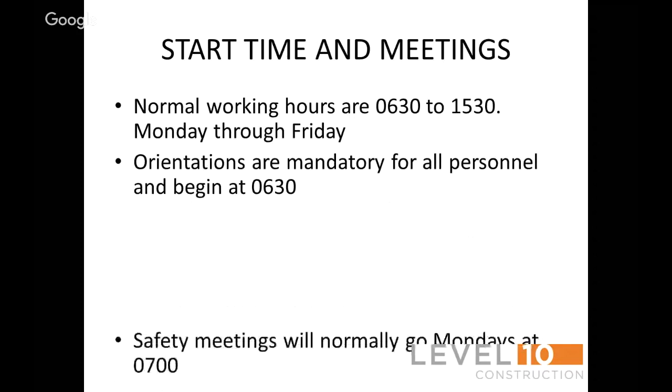Start time and meetings: normal working hours are 06:30 to 15:30, Monday through Friday, for all personnel. Safety meetings will normally be held Mondays at 0700. All floors are off limits until assigned for work. Parking is on the Timothy side of the building.

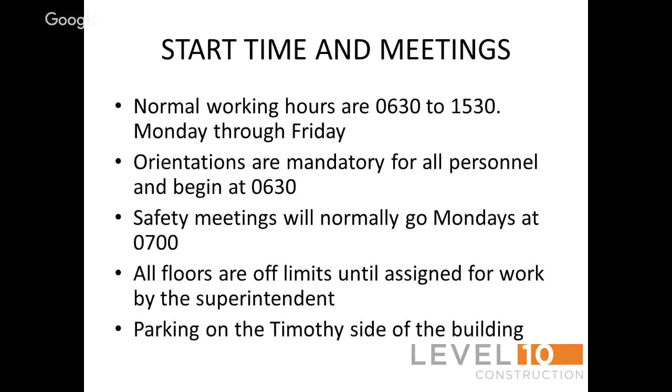At Level 10 Construction, first we need your help. We are beginning a journey together. We need your talents. Together, we will build at the highest levels of safety, environmental preservation, sustainability, quality, and value.

How will you work safely? You will plan and perform your jobs so you will continue to be injury-free. Superintendents, supervisors, and foremen will be safety role models for you. You will understand the safe way to do your task before you start. And you are authorized to stop work when you or anyone is in danger.

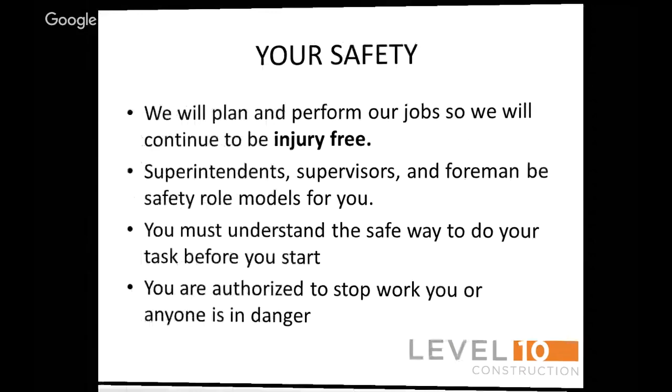What does it mean to work injury-free? Being injury-free means that you do not have a work-related injury or illness. You leave the job at the end of the day proud of the work that you have accomplished and the fact that no one was hurt. If you are a superintendent, supervisor, or foreman, the people you led today return home safely.

How do you do it? You need to pre-plan your work. Use your training or ask for additional training. Review the job hazard analysis. Be well rested and alert. Stretch and flex before you start. Think before you act, and complete pre-tasks.

We are working safe for our families, and we must protect the public and tenants we work around. Our safety program consists of an injury and illness prevention program, a heat illness and prevention program, a drug-free workplace, a stormwater pollution prevention plan, and a water and mold prevention plan.

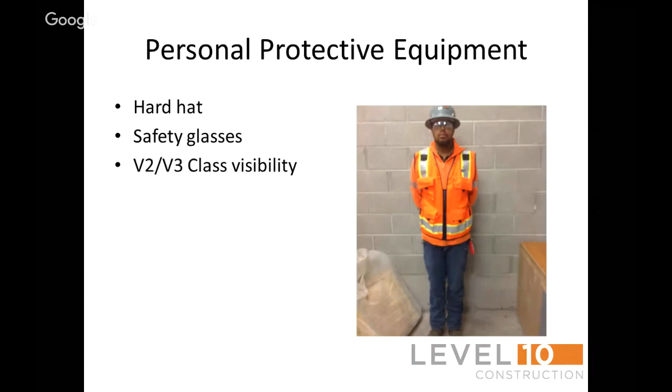You are required to wear a hard hat, safety glasses, Class 2 or Class 3 visibility, long pants, ASTM approved footwear, gloves, and shirts with sleeves.

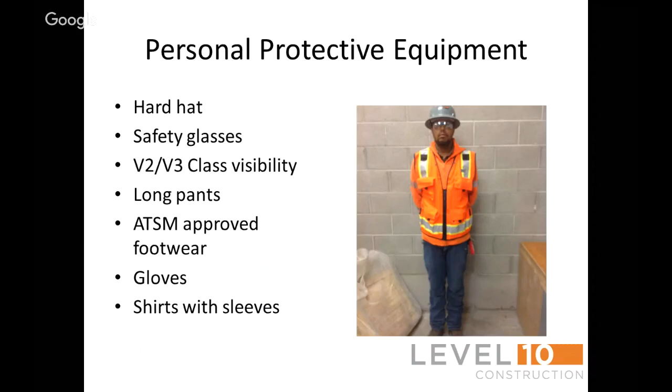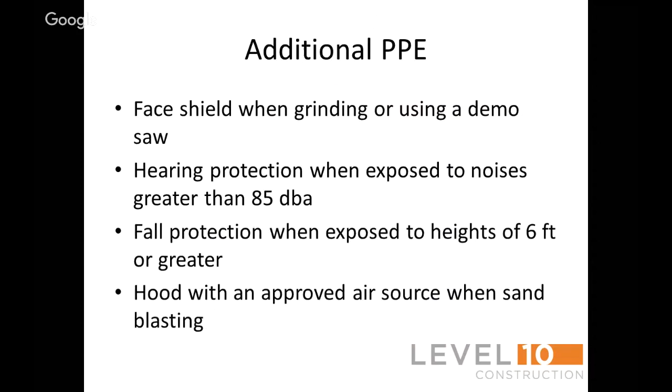Additional PPE may include a face shield when grinding or using a demo saw, hearing protection when exposed to noises greater than 85 decibels, fall protection when exposed to heights of 6 feet or greater, and hoods with an approved air source when sandblasting.

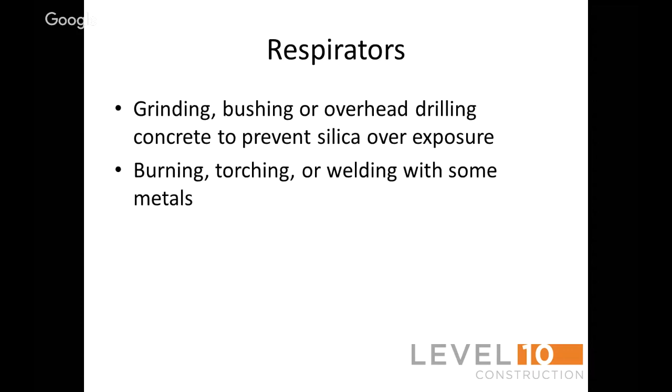Grinding, bushing, or overhead drilling concrete to prevent silica overexposure may require respirators. Burning, torching, or welding with some metals may also require respirators. You may be required to wear a respirator when the safety data sheet requires it.

Inspect your PPE daily when you wear it.

Heat illness prevention program: at least 2 quarts of clean water should be readily available per person, with 2 in reserve. Shade should be available at 80 degrees. At 95 degrees, the foreman will increase heat illness monitoring and take proactive steps to prevent heat-related injuries. Although this is a TI, sometimes the building will get hot. We still are required to follow regulations and monitor the temperature. It's not the temperature outside, but the temperature inside that we are worried about.

All employees have a right to take a break if they feel sick. Notify L10 management in the event someone is believed to be sick or injured.

A symptom of heat illness is thirst. You need to drink water to the point where you're not thirsty. Sweating is also a symptom. The first stage of heat illness is called heat stress or heat fatigue, when you get muscle cramps or headaches. The second stage is heat exhaustion, when you get dizzy, nauseous, or disoriented. The third stage is heat stroke. Usually at this point you stop sweating, you can lose consciousness, suffer brain damage, and you can die.

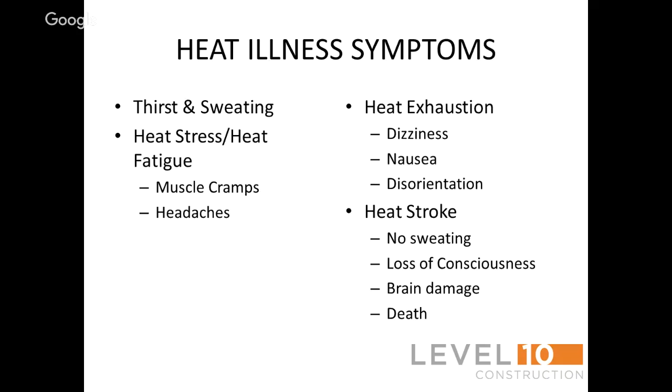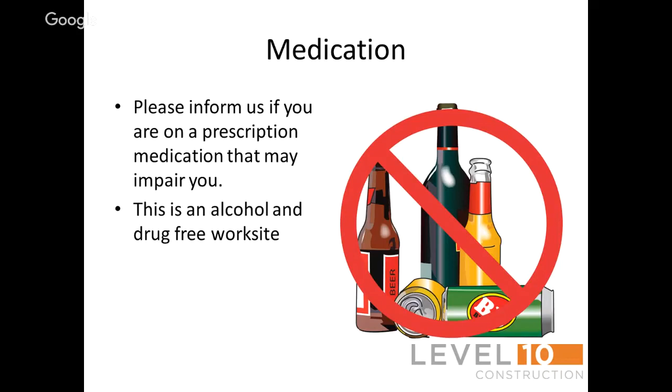Please inform us if you are on a prescription medication that may impair you. This is an alcohol, drug-free worksite.

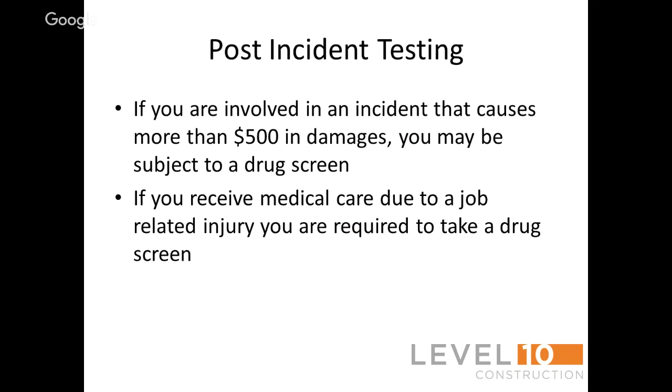Post-incident testing. If you were involved in an incident that causes more than $500 in damage, you may be subject to a drug screen. If you receive medical care due to a job-related injury, you are required to take a drug screen. Suspicion-based testing is also in effect on this job site.

Housekeeping. Materials must be stored in an orderly manner. Work areas must be cleaned daily. Spills must be immediately cleaned up, and material exposed to the weather must be cleaned up in accordance with the SWPPP.

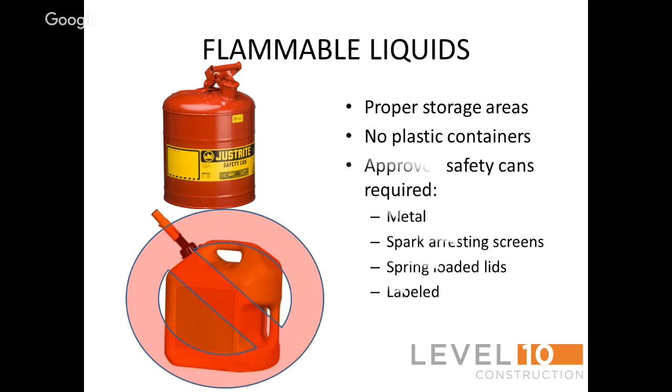Flammable liquids. Proper storage areas are required. No plastic containers. Approved safety cans are required. These will usually be metal, have spark arresting screens, have spring-loaded lids, and be labeled.

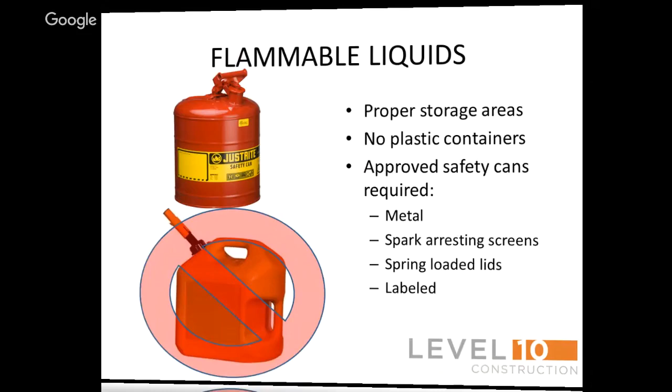Hot work. Any activity creating a flame or spark requires a hot work permit. Hot work permits typically...

Fire extinguishers. You must have fire extinguishers for hot work, fuel storage, fueling, flammable combustible material storage, temporary heating devices, etc. Electricity.

Consider everything to be energized until tested. During the demolition phase, we have electricians checking to make sure that everything is not on. Be sure that an electrician or a level 10 personnel has checked to make sure nothing is energized before you begin breaking through a wall.

GFCIs are mandatory. Inspect tools and cords for damage or wear. Immediately remove defective items. Use the right tool for the job.

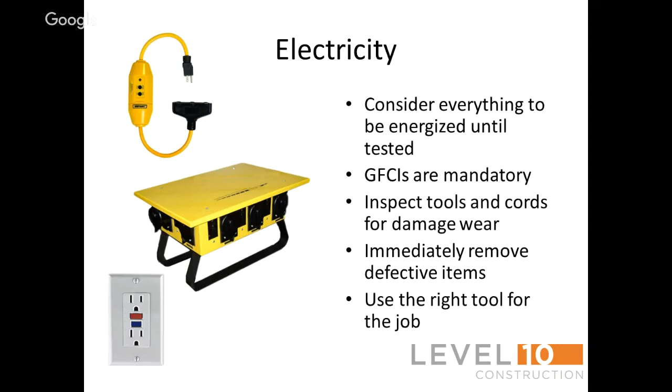Fall protection. Fall protection is required at 6 feet. Guardrails, safety nets, fall arrest and restraint systems, covers, etc. are to be used to keep employees from falling 6 feet or more. If you do not have some sort of fall protection and do not know what to do, contact your supervisor.

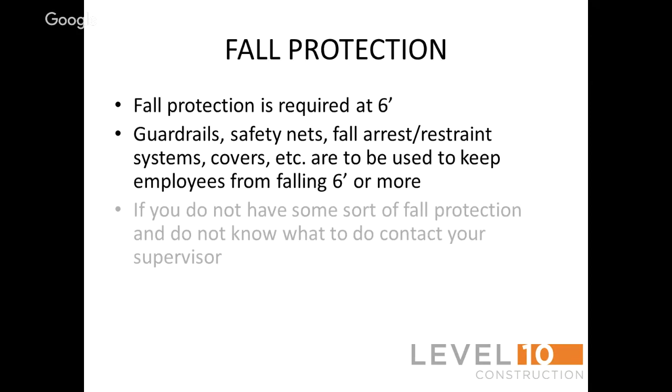No one will be exposed to fall distances greater than 15 feet or 1 floor, even if OSHA regulations allow it.

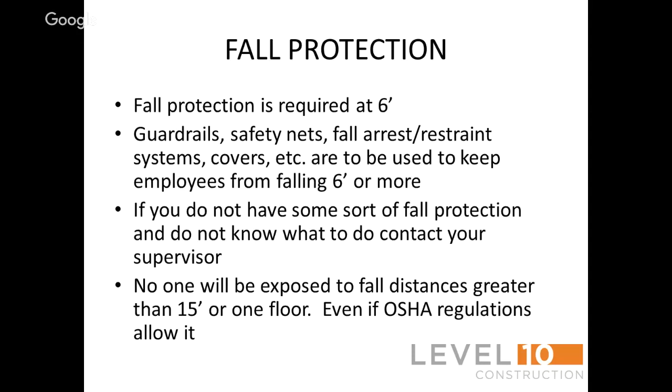Guardrail. The top rail should be at 39 to 45 inches, or an X bracing intersecting at 42 and 48. A mid rail should be at 18 to 24 inches, or an X bracing intersecting at 20 and 30 inches. The guardrail should be rated to 200 pounds.

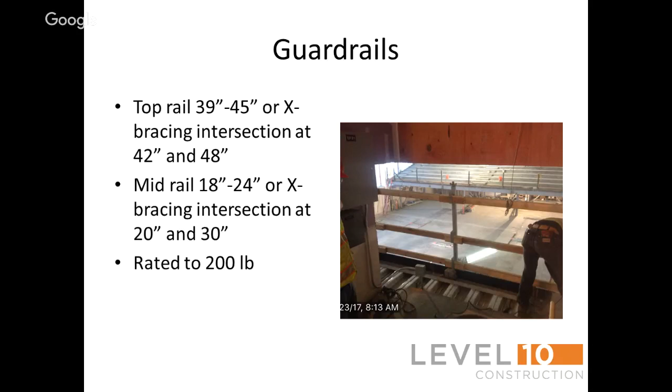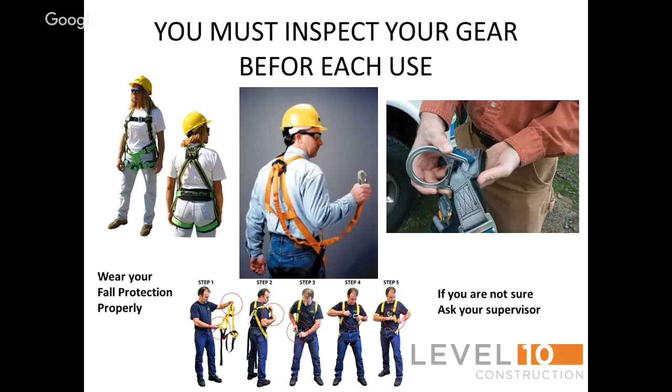You must inspect your gear before each use. Wear your fall protection properly. If you are not sure, ask your supervisor. Choose the right fall protection for the job.

Floor openings. Do not start making a hole until you are ready to protect it after it is cut. Hole covers must be labeled and rated to twice the intended load. Hole covers must be secured from movement.

Make sure ladders are secure from movement. Make sure ladder access is protected. Use the correct ladder for the job. No metal ladders. No type 2 or type 3 ladders. Inspect your ladders before each use.

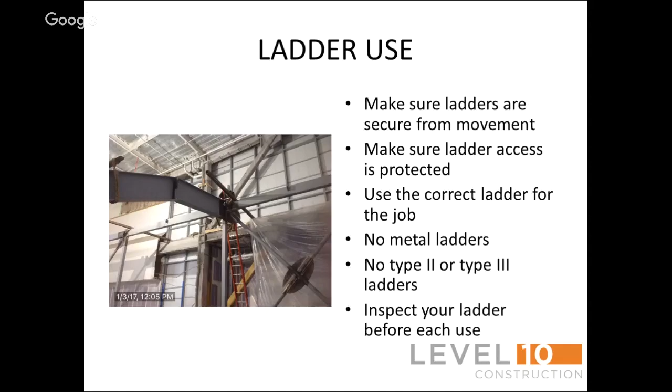These are ways you should not use your ladder.

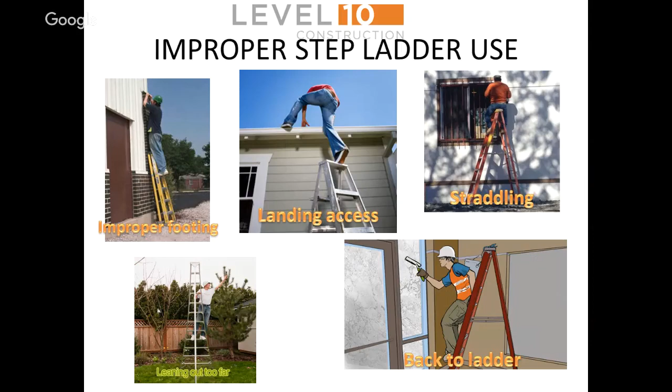Do not stand on the top cap or the rung below the top cap. Fully extend the ladder and ensure a firm, flat surface. Check stickers for legibility and special instructions. Inspect for damage. Lean into the ladder. Use 3 points of contact as you ascend and descend the ladder. The top cap is not for tool storage.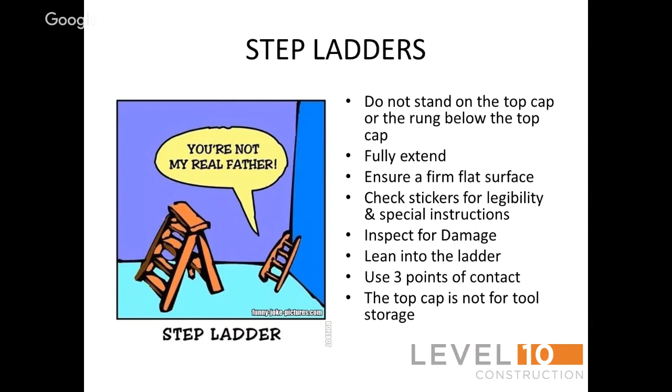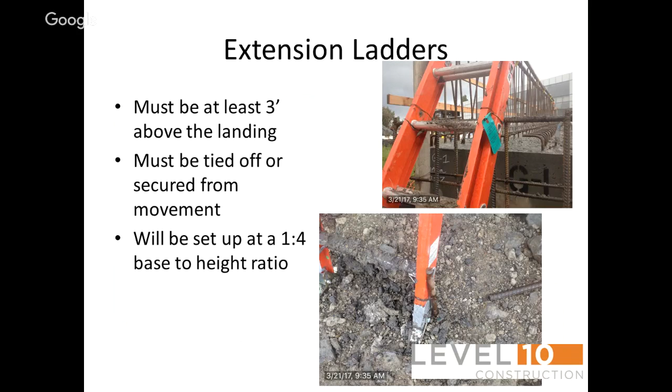Extension ladders. Extension ladders must extend at least 3 feet above the landing. They must be tied off or secured from movement. They will be set up at a 1:4 base to height ratio. Use of the top 3 rungs is prohibited.

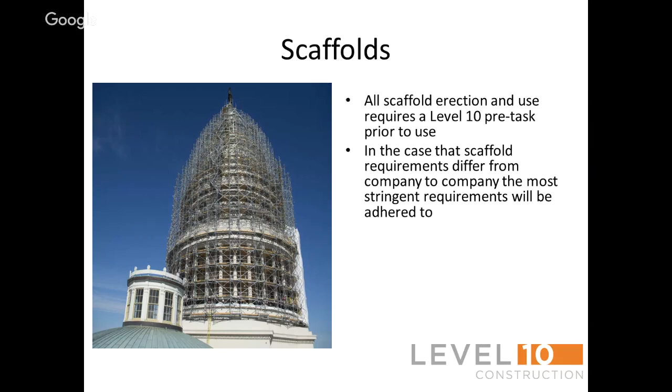Scaffolds. All scaffold erection and use requires a level 10 pre-task prior to use. In the case that scaffold requirements differ from company to company, the most stringent requirements will be adhered to. If you need to use a scaffold, don't until you have gone over and signed a pre-task with your foreman or an L10 supervisor.

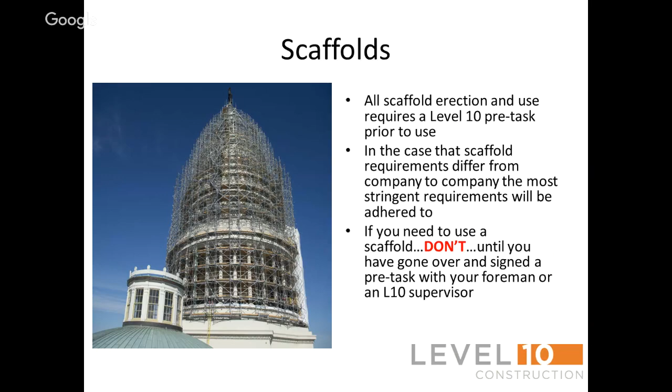Air-driven equipment. Air hoses greater than half an inch in diameter must have a safety device such as an OSHA valve, Hansen valve, or safety check valve. A safety cable or whip check is required in addition to a secure connection.

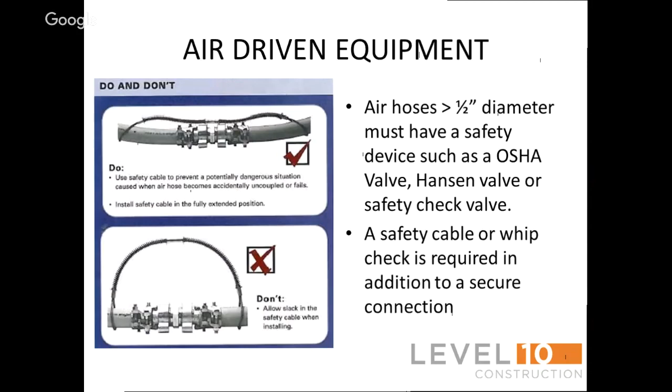Properly dispose of unused loads. Have a sign within 50 feet, and yell 'shot' before each firing. If you are firing more than 30 shots in an 8-hour time-weighted average period, you should be using lead-free loads.

Forklift, aerial lift, scissor lift, etc. operators must be trained and have training certification available if requested. Review hand signals with the signalman before operation.

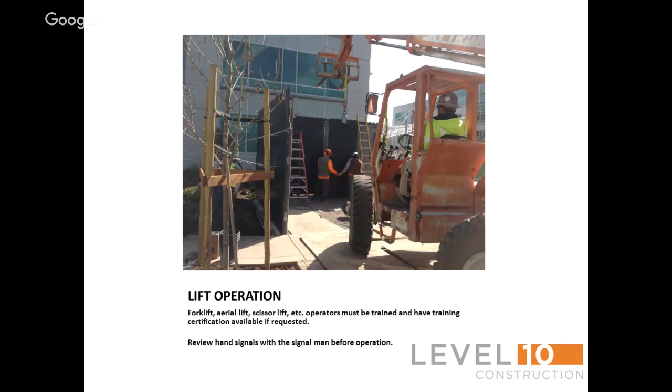Confined spaces: do not enter a confined space unless the atmosphere has been tested, you have been trained, and you are following Level 10's confined space program.

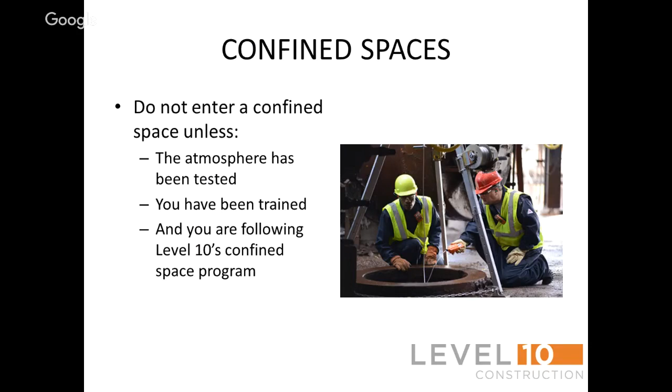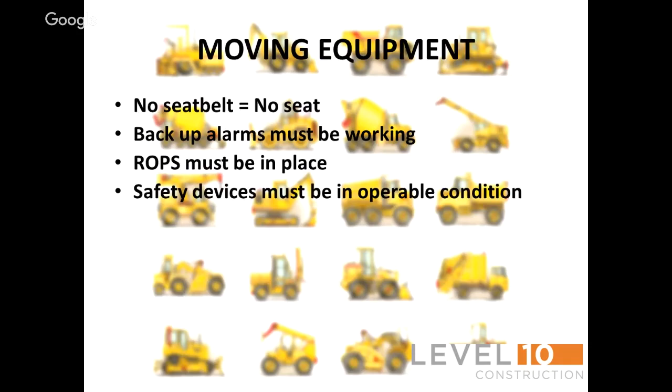Moving equipment: no seat belt, no go. Backup alarms must be working and ROPS must be in place. Safety devices must be in operable condition. Damaged equipment is not to be used. Vehicles should not be left idle more than 3 minutes. Precautions may be required when using vehicles indoors.

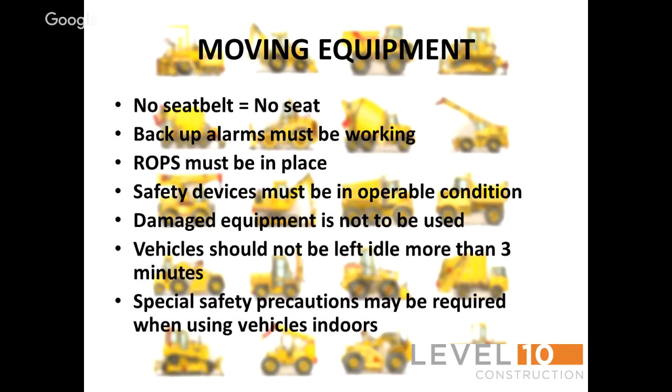Give me 20 program: operators are responsible for the safety of the people on the ground next to them. All workers on the ground are responsible for being visible to the equipment operators. Operators and ground personnel will acknowledge that they have seen each other.

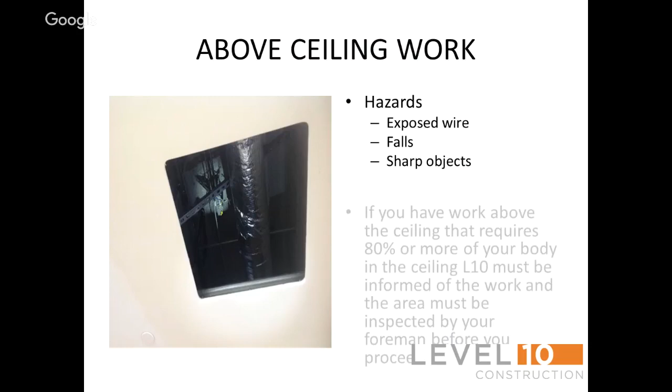Above ceiling work. Above ceiling hazards include exposed wire, falls, and sharp objects. If you have work above the ceiling that requires 80% or more of your body in the ceiling, L10 must be informed of the work, and the area must be inspected by your foreman before you proceed.

JHAs and SDSs: job hazard analysis will be conducted throughout the life of the job. Safety data sheets will be readily available for review prior to exposure to potentially hazardous or harmful substances. There will most likely be chemicals on this job that are known to cause cancer or reproductive harm. This is the Proposition 65 warning.

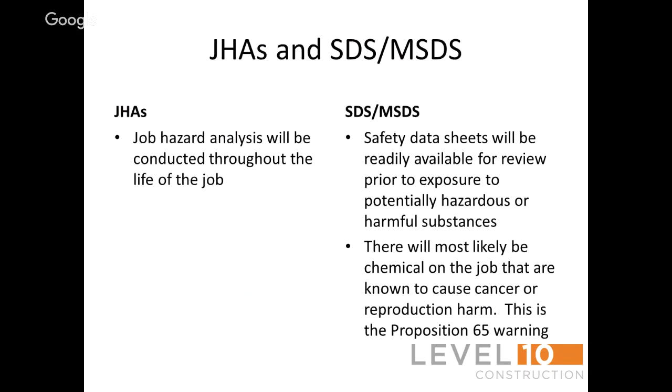Bathrooms: toilets and wash stations are available. Toilets should be a minimum of 50 feet away from the storm drain. Avoid using building wash and sanitation facilities. Do not damage or deface the toilets. Separate toilets will be provided for women. Let your L10 team know if there is a problem.

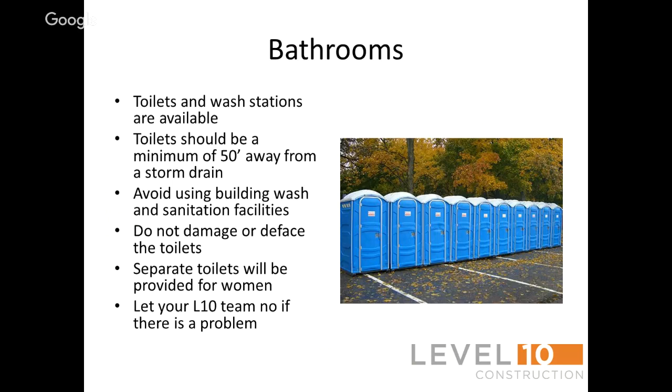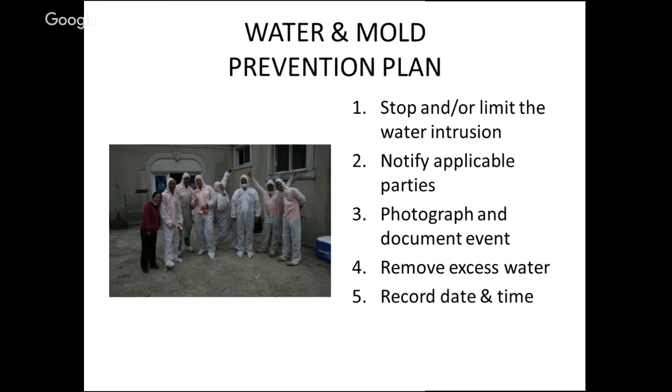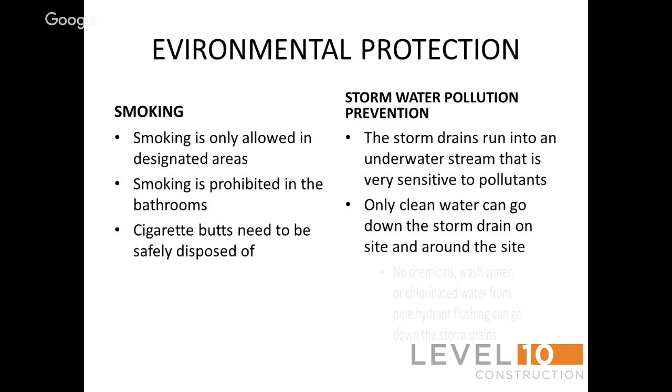The storm drains run into an underwater stream. Mud is a pollutant. Try to stay on pavement or rocked surfaces with your vehicle.

All soiled cars, trucks, and equipment must go through a wash station following best management practices at the site. Do not run over, damage, or remove wattles, silt fences, rock bags, or inlet protection without returning the BMPs to the condition you found them in.

No materials are to be dumped on the ground; only water can be dumped on the ground. If there is a fuel, oil, hydraulic fluid, or concrete spill, it must be contained and cleaned up immediately. Contaminated soil will be properly disposed of.

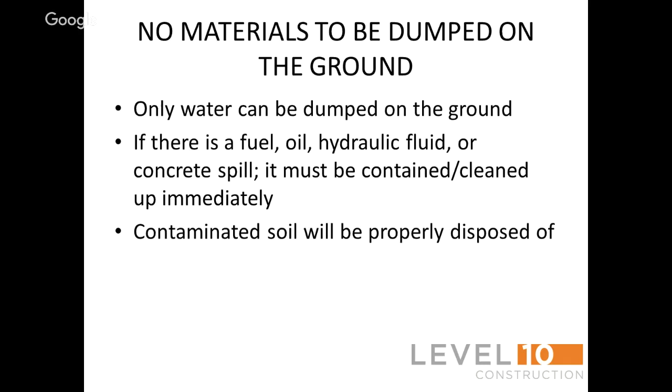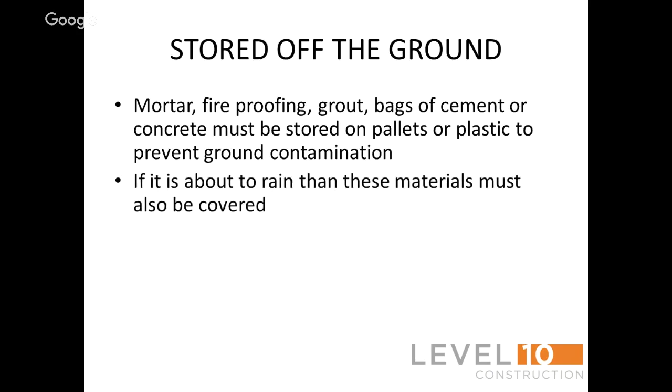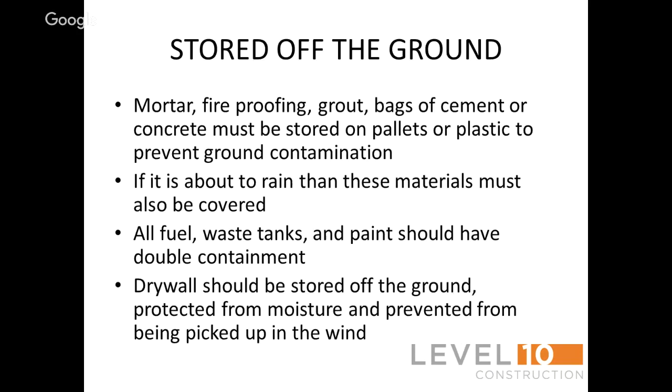Materials should be stored off the ground. Mortar, fireproofing, grout, and bags of cement or concrete must be stored on pallets or plastic to prevent ground contamination. If it is about to rain, these materials must also be covered. All fuel, waste tanks, and paint should have double containment. Drywall should be stored off the ground, protected from moisture, and prevented from being picked up in the wind.

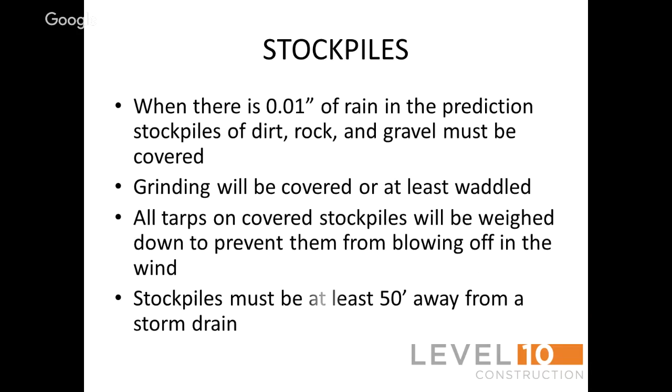Debris boxes should be placed a minimum of 50 feet away from the storm drains. All debris boxes will be covered during rains to prevent pollution.

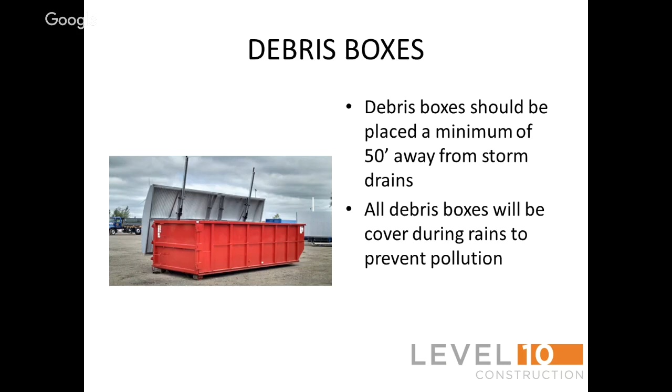Injury: if you are injured, let us know immediately. We have first aid trained people on site, or we can bring paramedics onto the site.

Remember, we are building at the highest level of safety, environmental preservation, sustainability, quality, and value. You always have a right to stop work to mitigate a hazard.